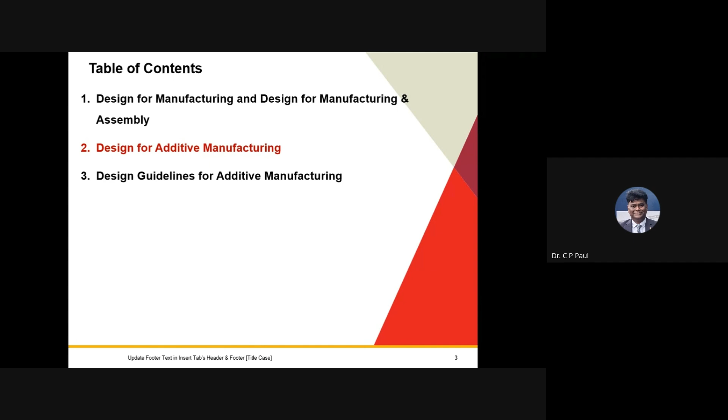Design for manufacturing and assembly is important because these two aspects are inseparable for production engineers, when we talk of functionality and manufacturability. At one end, you have to focus on the functionality of the component or system you are developing; at the same time, manufacturability is also important. So people started thinking on this, and we, being conventional engineers, were pushed to develop our whole thought process so that it is inherently imbibed in our thinking how a component will be built if we design it in a certain way. So the concept of design for manufacturing brought a big change.

With the change in emphasis, specifically with the introduction of mass production of components, especially when talking of batch production or assembly lines, the concept of design for manufacturing was further extended to ensure interchangeability and repetition by including the criteria of assembly. So it became design for manufacturing and assembly.

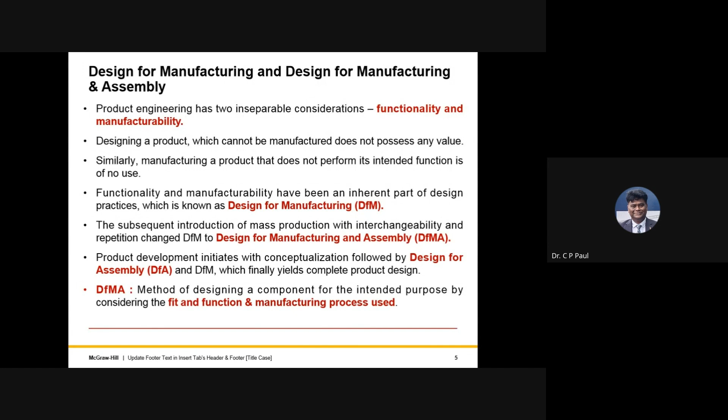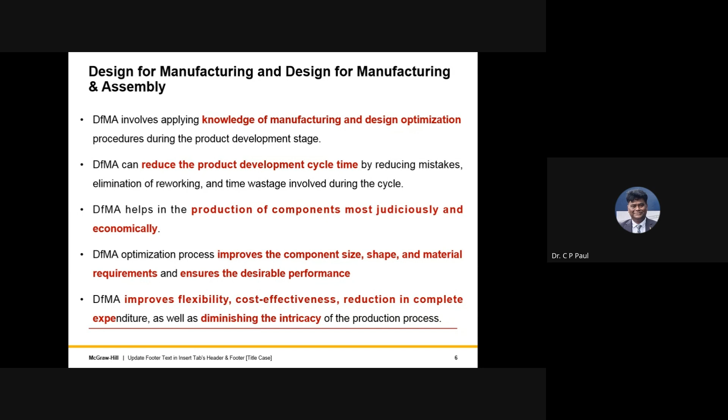As far as DFMA is concerned, you should have knowledge of manufacturing and design optimization procedures. Finally, it reduces the product development cycle time and brings economic benefits into the picture. Definitely component size, shape, and requirement changes, and ensures desirability and performance. In summary, DFMA brought flexibility, cost effectiveness, reduction in complete expenditure, and diminishing intricacy in the production process, bringing a leap in development of different components and manufacturing.

It starts with the design concept, then we go for design for assembly, how the different components will be assembled. Then we talk of material and process selection and cost estimation. Then we take the best design concept, and after that we go for design for manufacturing, followed by design for minimum manufacturing cost. Then we go for the prototype, and once this is built, we go for production.

At the same time, if we find there are issues in the assembly, people take it back and modify it, so that the product structure becomes simple from the assembly point of view. At the second point, people also check that yes, it's simple from the product structure point of view, but is it economical or not, and should we remove or add something?

For example, sometimes the designer's dimensions may come out as some odd dimension, say 103 millimeters. Now we know that 100 millimeter is a standard bar available in the market, so you can always modify your design and size so that economicity can be brought into the picture, and decisions can be made accordingly.

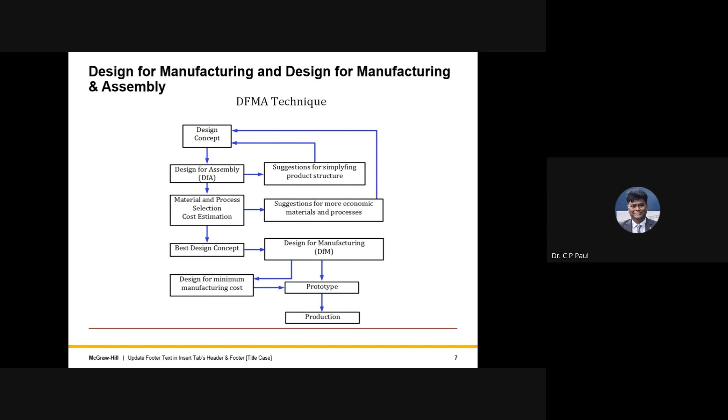Once the prototype is made, this basically serves as proof of concept of the whole stuff that we've built, and then we go for production. This is the typical flow chart that we follow for design for manufacturing and assembly.

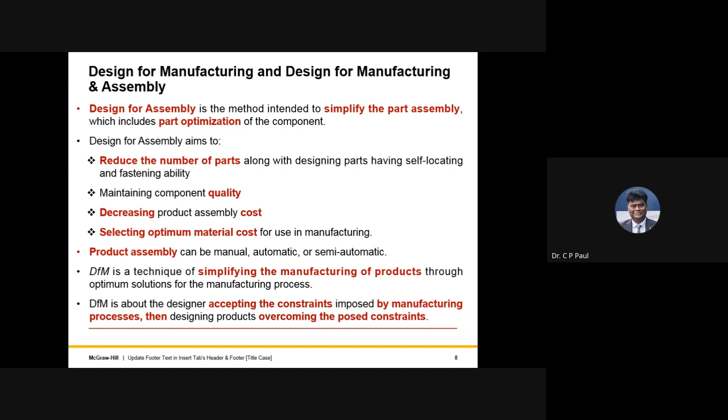These things have definitely changed the stuff and brought a lot of economic benefit, optimization on the material side, and simplified the manufacturing of products, without compromising on the constraints put by the manufacturing process, and overcoming whatever constraints are posed while designing the product. So this concept really moved out and worked for many years.

With the introduction of additive manufacturing, when we talk of the terminology called 'complexity for free,' we came to realize we have to think from the additive manufacturing point of view in such a way that we are able to achieve things in a bigger way.

If you see the way things work today, many of the things we build, we have not changed the design of the component considering additive manufacturing as a process. Earlier this was made by some conventional process; now we are making the same thing as a direct part, by directly using additive manufacturing. So that is the first stage of design for additive manufacturing.

Then we are only replacing the process, nothing is changed. After that, once the part is made and built, we may go for the second level, where we are focusing on the form of the component, not the function. For example, in conventional manufacturing we may use two parts welded together, and to support the welding there are some features included in the part.

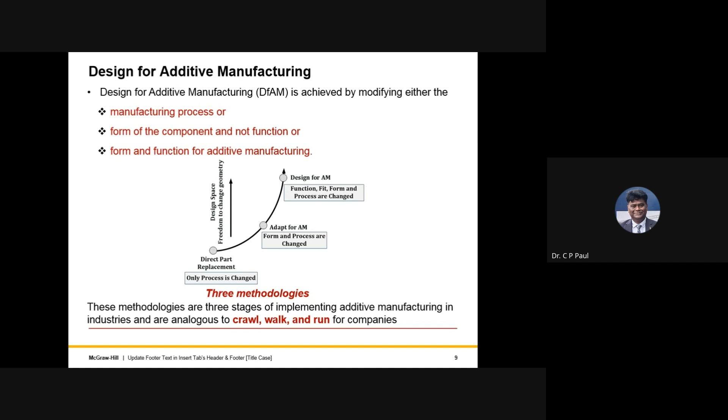When I'm talking of the first step, which is the direct part replacement, here we are changing only the manufacturing process. Earlier you were making something by casting or by fabrication. Now we are doing this specifically for components which are obsolete, maybe some pumps or particular components which are not supplied by the OEM anymore. You want to build it, so we do the reverse engineering of that, and the process is changed.

Now, in this particular thing, when you want to reduce the cost of material use, people are thinking how the complexity of the process can be removed, whatever is put into this, and the number of parts which are brought into this are also removed.

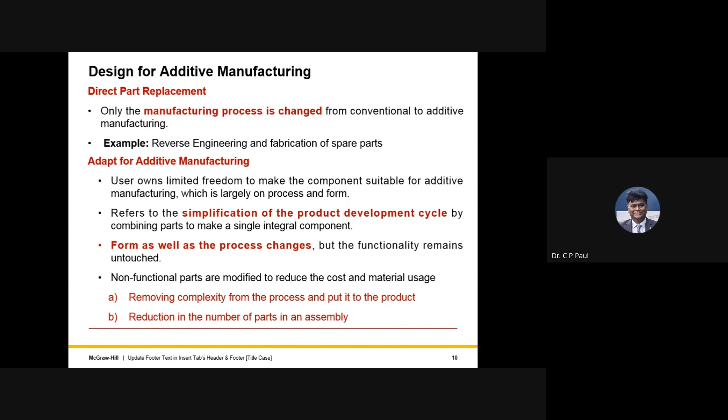For example, one of the classical examples that people talk of is GE's fuel nozzle, which had 20 parts. When it was made using additive manufacturing, they were reduced to one. So what is happening is a number of stages are removed, and that's the way the whole thing can be brought. That is the idea when we are talking of step number 2, which is adapting for additive manufacturing after improving things from direct part replacement. But I already told you, if you want to go to the final phase of adoption of the technology, we need to focus on form, fit, function, and the process as complete freedom.

We should start thinking differently, so that we really forgo the things we learned as a conventional manufacturing engineer, but try to bring the concepts of additive manufacturing imbibed into us, so that we think differently and take advantage of the full potential of additive manufacturing, specifically by employing concepts like generative design, topology optimization, and bio-inspired components, so that this becomes a very attractive technology for making components.

If you see the whole process, the design process is moved from design for manufacturing to feature-based design and manufacturing. This means today people are not thinking about what material they want to use. They are focusing on what feature they want, and according to the feature, they can think of bringing in different materials, and that's the way the new paradigm has come when we are talking of feature-based design and manufacturing.

For example, in a part you can have a multi-material concept. You can have two different materials - wherever you want better cooling, you can use copper as a material; wherever you want strength, there you can use steel as a material. So the combination is that we are not thinking a lot about the material, but focusing on the features that we want, and accordingly the whole product is built and made.

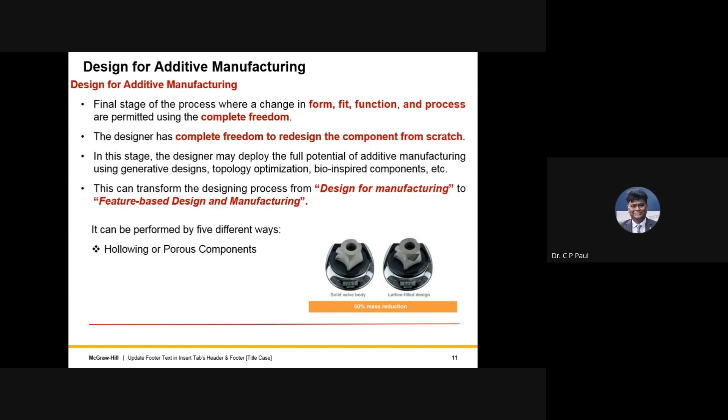You see this particular component here - these are the parts which are made, and you can remove the porosity and give only the feature that you want. As a result, you have a really good reduction in the weight of the part just by making a lattice-filled design. Though externally everything looks the same, the hollow and porous structure has really saved a lot of cost and production time while fabricating the components.

Another concept is, for example, when you are working on a design - say you see the first conventional bracket which is built, and when they did the topology optimization, they could reach an optimized design, which is altogether a different concept, and the technology is used.

So what we are doing in additive manufacturing is, we are not making the conventional bracket, but taking it to the optimum shape, which is very attractive. The design is basically focused on the stress flow in the material, which gives the advantage. Making an optimized design using additive manufacturing is not challenging, while if the same is built by conventional method, then a lot of things have to be brought in.

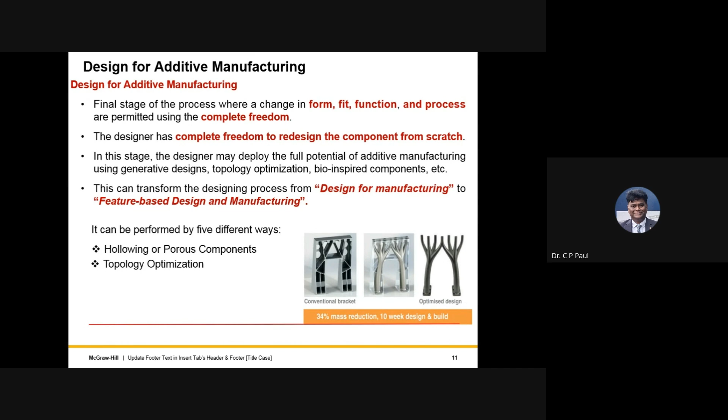There can be a case when we want higher surface area per unit volume. So to increase heat transfer, we can think of using aluminum heat exchangers like racing cars, how complicated things are built, especially very nice fins are built. These are not possible by conventional methods.

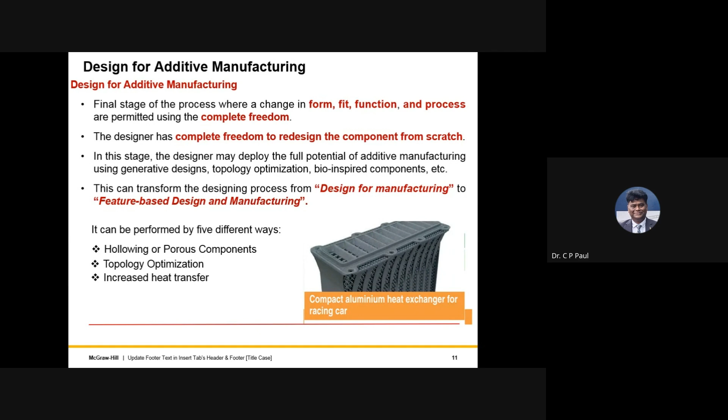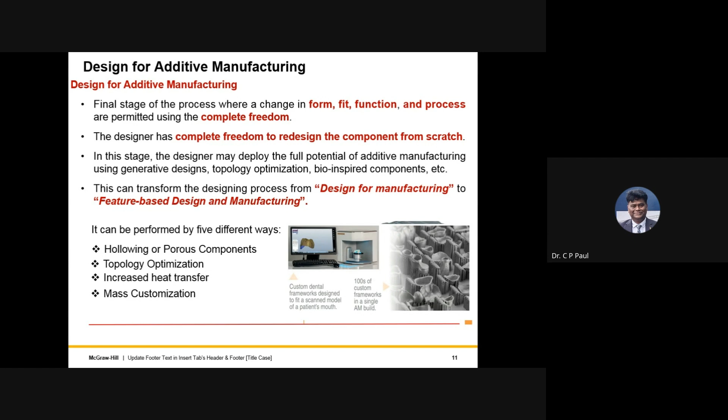Again, this is the output of the finite element design that people use as a tool to design the components. It is possible to have mass customization, like you can have hundreds of custom dental frameworks built in a single build. So these are the things, how you do nesting of different parts and go for mass customization, building in one way, making a difference as far as design for additive manufacturing technology comes.

If you want to make a bicycle, you see the frame has bricks on it, and we need not build the whole stuff the way it looks. You can always make a small part by breaking the components and bring it to the size we are looking for and join them together. Here you see the left and right hand side, we have a bike and how the frame is built in a beautiful way so that in lesser time, the whole component can be built as a single unit and later trimmed off and joined together so that the desired design can be achieved.

So this is the way design for additive manufacturing has to be thought. It's not about making the whole assembly in one way, but how can you make small parts which fall within the build volume of the machine, the build envelope of the machine, so that the component can be built to the next level.

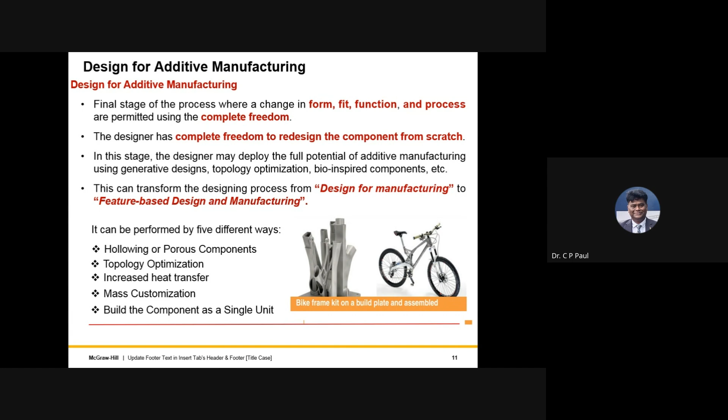So what is happening when we are talking of these five different ways of doing design for additive manufacturing? We have to have some rules in our mind so that we can proceed and make the things into this.

The first concept is part orientation. We have to think of part orientation as the alignment of the CAD model on the additive manufacturing build plate, and you have to make it in such a way that the support structure required to build the component should be minimum. At the same time, the slicing surface, because it's a well-known fact, the surface quality on Z, the vertical plane, is better than the horizontal plane where the components are built.

So if you want really good surface finish, you have to bring it to the vertical plane. But the component size may be such that it may not support that. So slicing strategy has to be built in such a way that it helps. At the same time, we have to go for really optimum toolpath generation, because in my last talk I told that we are making a change of orientation by 67 degrees in every layer as standard practice.

So that residual stress and distortion can be reduced. Here we have to focus on toolpath generation so that the different components, specifically when talking of different sections within a layer, how it's going to come together has to be in your mind, and we are focusing specifically on part orientation.

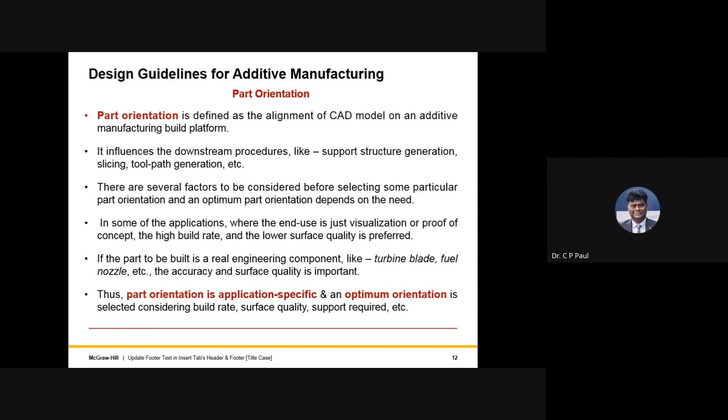But during the process itself, how the main design can be disintegrated or reoriented in such a way that it leads to optimum fabrication time, optimum use of material, least support structures, and the surface quality should be in the best possible way. Therefore, part orientation is application specific, and optimum orientation is selected mostly focusing on build rate, surface quality, and support conditions required.

Now, support structure is required to build a component, specifically if it has overhang structures. For example, if we talk of making some overhang structure and you want to work on it, people use some other material for this, and these materials are normally sacrificial material, and the joining with the main part is also thought to be minimal, and they should be easily removable.

And specifically when you are doing a lot of support structure, it should facilitate the fabrication of complex geometries, and generally it is removed after the completion of the build process.

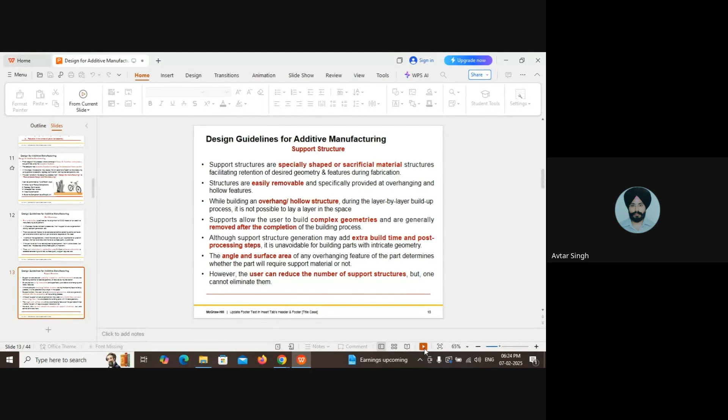The complexity should be such that we can easily remove support structures after completion of the build process. More support involvement results in extra build time and post-processing steps. Therefore, we should avoid having support structure as much as possible. It should be as least as possible. This is also a criteria for design for additive manufacturing which we need to consider.

Surface area and the angle need to be designed in such a way that support structure requirements are reduced. In general, you can always think of reducing the support structure in additive manufacturing, but it's not possible to make it zero, because of the complex geometry of the component that you are building.

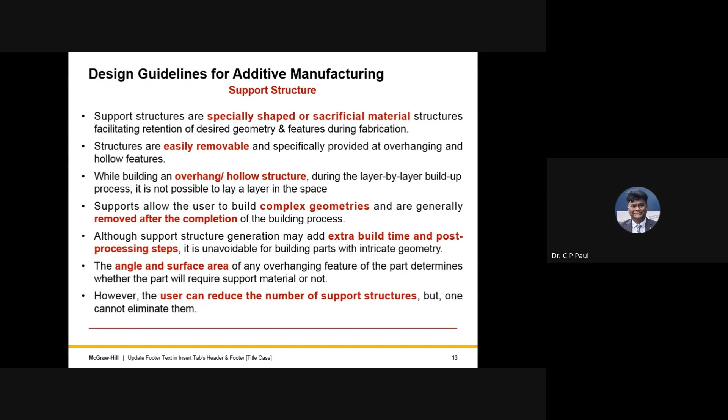Now, how do people make different types of support structure? Specifically when using CAD models in pre-processing software, people generally divide the component into three geometry locations: down skin, inner core, and up skin. Different types of support structure are fabricated for each so that post-processing steps can be reduced.

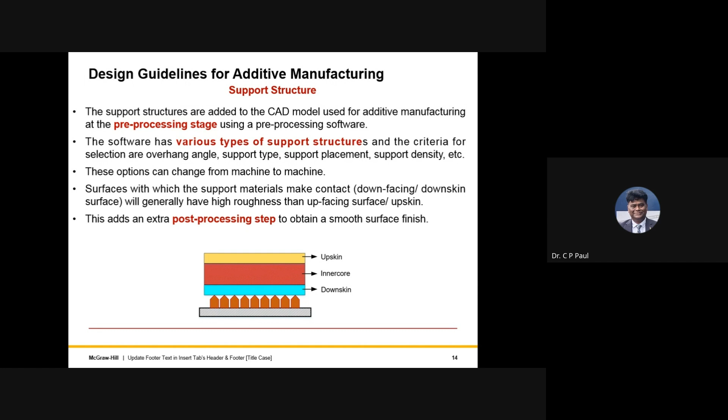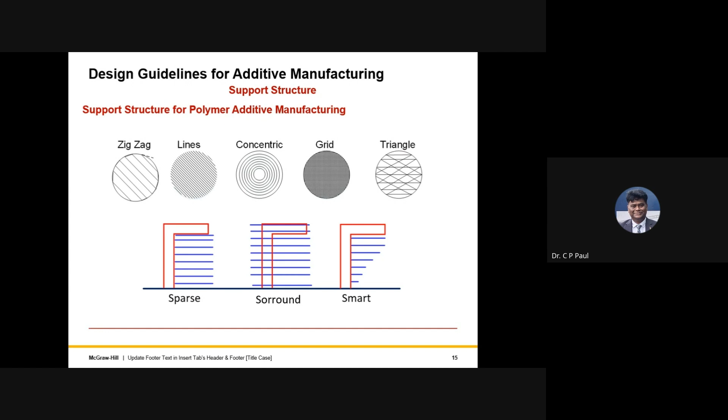Whatever filling we do for the support structure, in all criteria like sparse, surround, and smart, this can be in the form of zigzag, lines, concentric, grid, or triangle, depending on the application. Most widely, people use lines, so the work can be easy to carry out.

In metal additive manufacturing, the most common application of support structures is to build components with overhang structures. It's also used to transfer heat from the top layer to the bottom layers, so that overhang structures are not affected.

For example, if you make a very fine and thin support structure for supporting any surface, you have to think about how well it handles the heat when going for multi-layer deposition.

When making support structures, we also have to think about how they are placed so that warpage and build failure can be reduced, and specifically the cumulative residual stress generated during the process can be brought down. This is also part of what people think about directly with support structures.

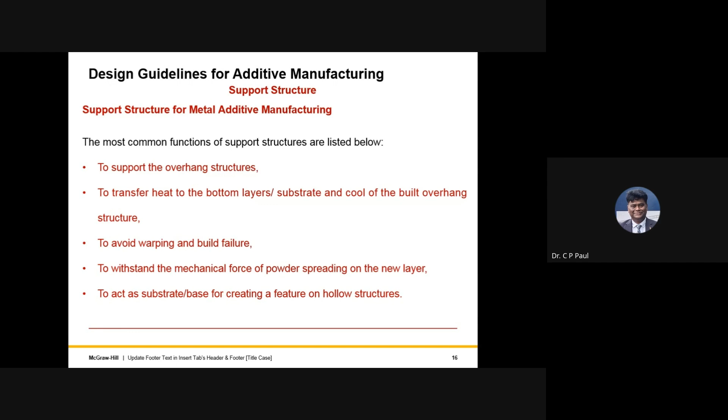The primary support structures are generally generated using 3D modeling software with some user-defined features. But when it comes to defining the secondary support structure, they have to be taken care of specifically using pre-processing software in the support generation options.

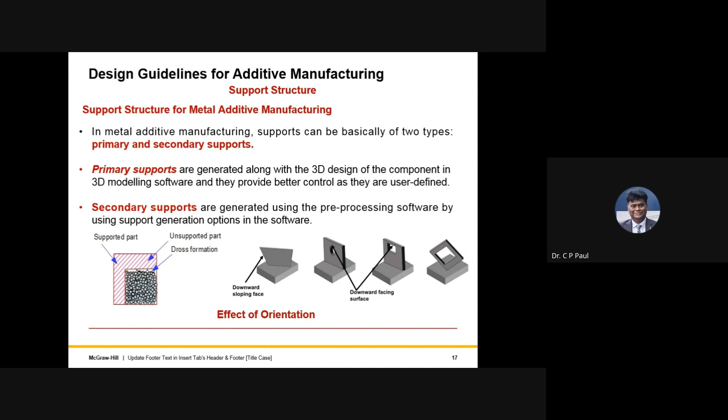Consider the effect of orientation - in the first figure, the downward sloping face decides what the support structure will be and what surface quality we get. Similarly, for circular versus rectangular geometry, the overhang surface helps decide how the support will be applied. So depending on the geometry and type of component, we have to think about how the support structure will help in different formats.

Support structures are normally block type - you can see different caches that have been made. Then there is point type, where you have support from a single point, and also complex web and contour type.

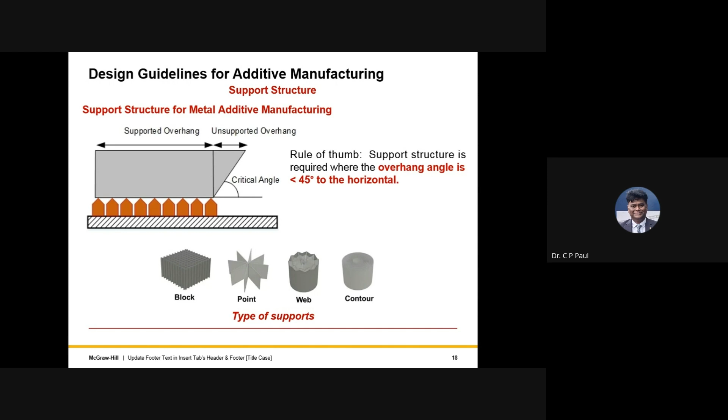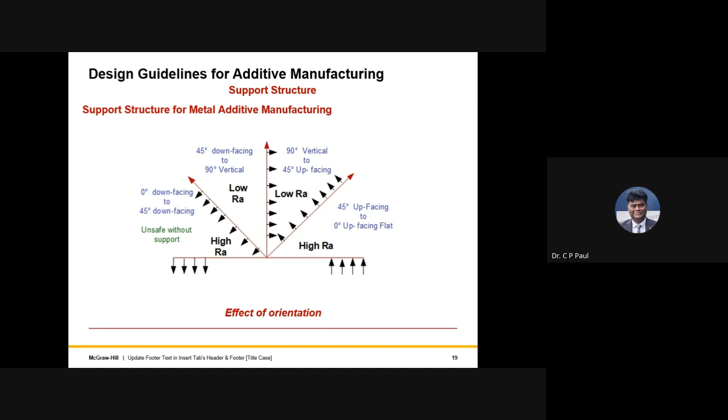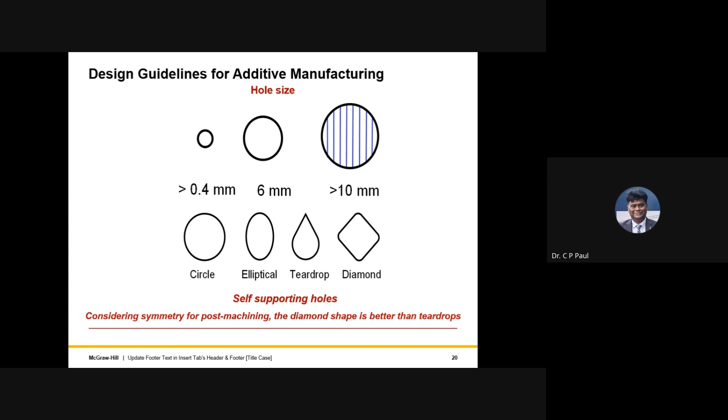Circular holes are not a very good concept for additive manufacturing. There is always a thrust towards using a teardrop or diamond shape instead, so these shapes can be used more supportively. So if you have the option of a circular hole or a teardrop hole, in the direction of building we would prefer a teardrop or diamond shaped hole, so the thing can be taken to the next level.

As I already told you, ellipticals can be built about 25 millimeters tall if the height of the ellipse is twice the width, and similarly teardrop shaped holes, a combination of circular and straight line portions forming a peak, can be built this way. Teardrop and diamond profiles are commonly used in fluid channels as they have comparable hydraulic performance. You must know that in fluid dynamic design, hydraulic diameter is used to identify some of these things, and here it is the same.

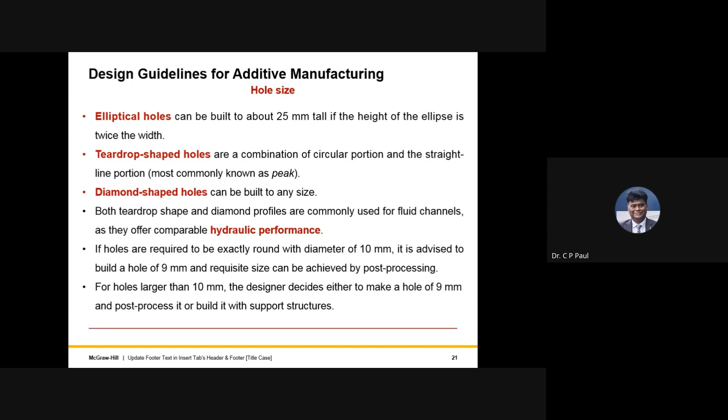If the holes are required exactly round at 10 millimeters, it is advised to build a hole of about 9 millimeters, less than 1 millimeter under, and achieve the requisite size in post-processing. Anything more than 10 millimeters needs a real surface support structure, which makes things different in format.

The layer thickness and build rate is the second thing we need to focus on. If you have a higher layer thickness, there would be a stair-stepping effect. Though the build rates are good, removing the stair-stepping effect will also cause extra post-processing time. So we have to optimize how to handle the stair-stepping, or go for a lower layer thickness. That's how people decide and define this.

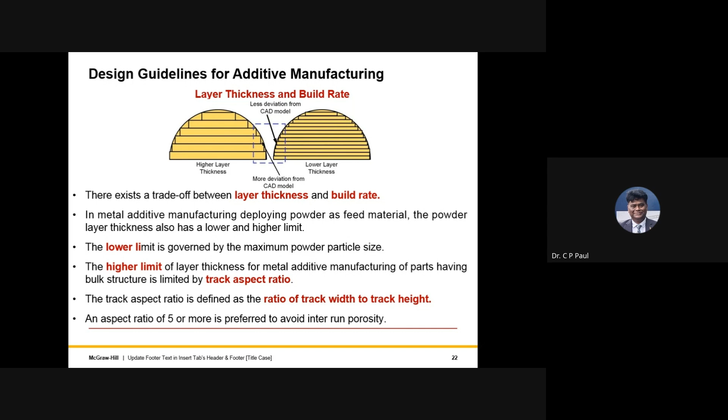In general, the lower limit of layer thickness is governed by the maximum powder particle size used, whether in powder bed fusion or directed energy deposition. At the same time, the higher limit of layer thickness is defined by the track aspect ratio. In most cases, the track aspect ratio, meaning the width of the track divided by the height of the track while depositing material, has to be more than 5, otherwise it will lead to inter-run porosity. So this is how layer thickness and build rate are determined.

There are also issues as far as the minimum wall thickness and ribs are concerned, and there are guidelines people have built on this. For example, if you're making a basic building block where you're more bothered about distortion and weakness, you need to focus on these things. In case of laser, the diameter of the energy source or nozzle defines the wall thickness in a big way. In general, for metal additive manufacturing, values of 0.4 to 0.6 millimeter are fine, and in polymers, 0.8 millimeter thick wall can be built easily. This is the number available so far.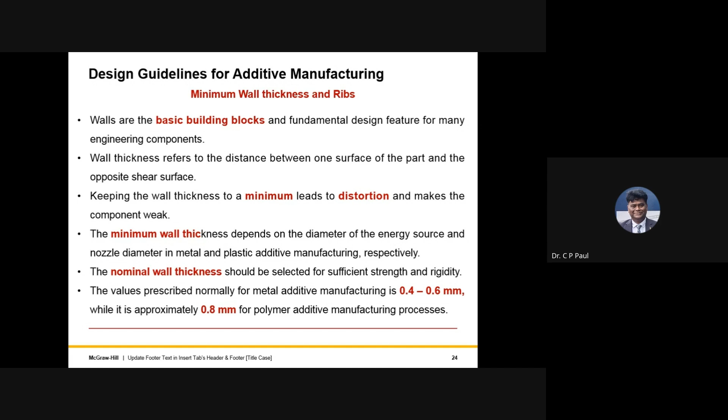In polymer manufacturing, we mainly use material extrusion processes like FDM. You cannot go less than twice the diameter of the nozzle. For example, if you're using a nozzle of 0.4 millimeter, the minimum wall thickness you can go for is 0.8. That is the minimal criteria people think and go ahead with.

Another thing that comes into the picture is how the perpendicularity of the surfaces are maintained, and there may be distortion or deviation while meeting an L-shaped structure and wall which we want to be perpendicular. So people give some ribs which are used to distribute the forces while making the part and reduce the stresses and distortion, minimizing material wastage and time.

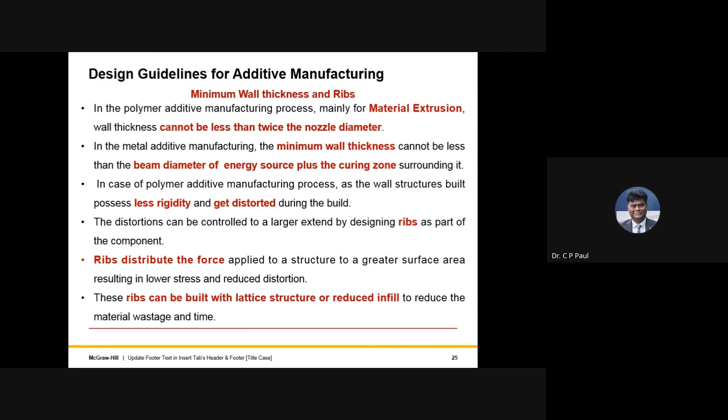So if you talk of making a minimum wall thickness and ribs, suppose you have a thin wall as I've shown here, people go for making a rib so the thing can be built. Thickness of the ribs is normally 75% of the wall thickness, and the height of the rib has to be less than 3 times the thickness. Rib spacing has to be greater than 2 times the thickness, and fillet at the point contact of the rib and wall decides many of the parameters. So this is how minimum wall thickness and ribs are built in general, in plastic as well as metal additive manufacturing.

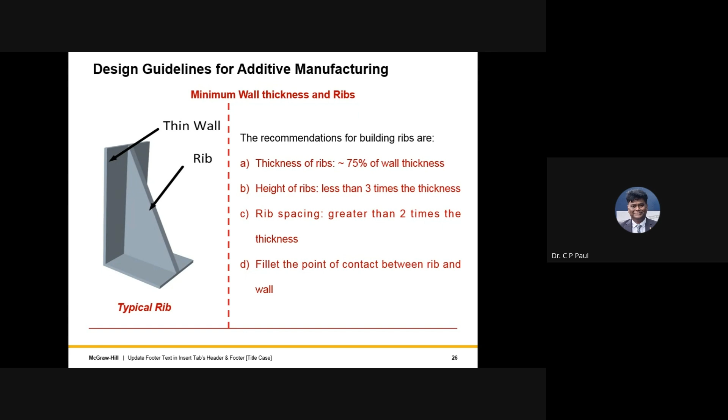Another thing that defines the build volume of the machine is the maximum part size you can build using it. Whenever you have larger components which are marginally larger, you can think of going for scale-down components. But if that's not possible, you have to break the component into different segments and put them together so the overall fabrication size or build time is low. That is the concept that decides the maximum part size.

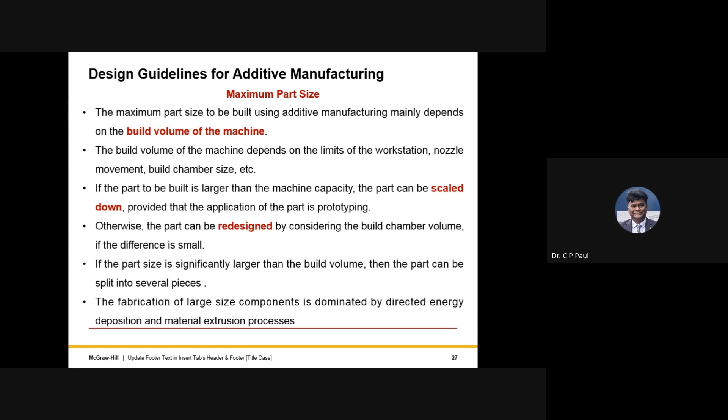Many times it happens that a design may be off by 2 or 3 millimeters. Then a design review can be done and the component built accordingly. It is true that large size components can be built using directed energy deposition and material extrusion processes, and other processes are not competitive, which we need to understand. This is the thumb rule as general guidelines for design for additive manufacturing.

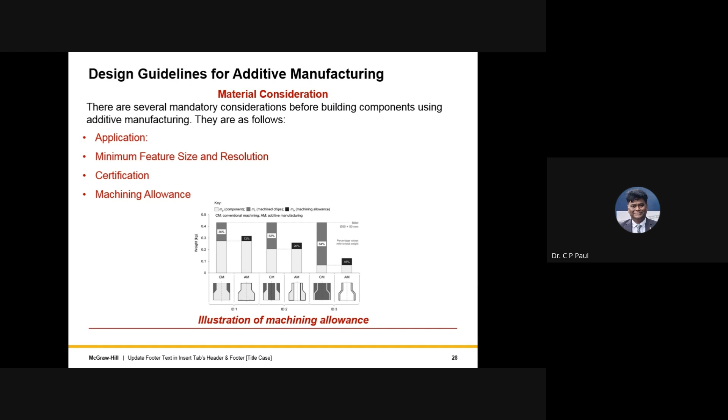When making different components, material also plays a role, because the material's thermophysical properties and compatibility when using different materials matter. It's decided basically by what applications we're using, what minimum feature size and resolution we want, what the certification criteria are, and how machining allowances are placed on different surfaces. These are things we need to work out, and material considerations are very important for making different shapes in the part.

So in general, the thumb rule is avoid dissimilar material parts, because dissimilar material parts create a lot of stresses at different levels, so people want to avoid it. Second, if a single material part is made, that's good. People do not go for dissimilar materials for two parts if the function does not demand it. Reduce the use of expensive materials if the application allows - for example, you can have a core with one material and the surface from another, if your application demands only surface properties, not bulk properties. Implementation of hollow or lattice design for expensive materials, for economic consideration, is also important.

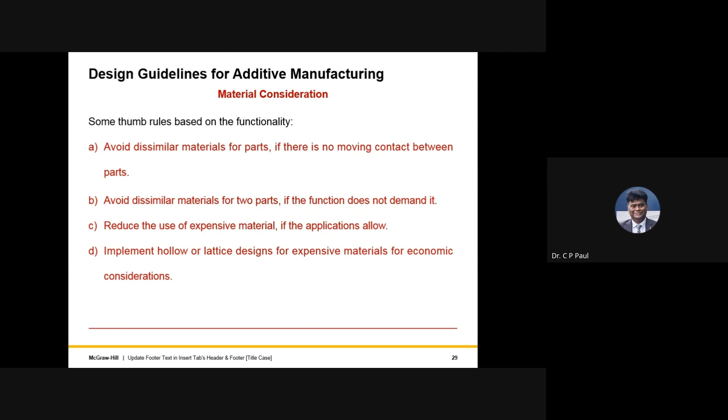So these are the things we consider as design guidelines for additive manufacturing, especially focusing on material consideration.

There was a discussion on residual stress during additive manufacturing. We have to focus on the temperature gradient mechanism rather than this. For example, I always tell students that if you put a whole plate into a furnace, the whole component is heated, and when cooled, the whole component is cooled. But this is not happening with lasers. What happens is when you put the laser on a substrate, the substrate gets expanded locally because of the temperature, and you have stress coming on that.

But what happens the moment the laser melts the material into molten conditions, all the stresses developed during the heating process become zero. When the laser moves out from the location and there is cooling of the substrate, you generate stresses which are tensile in nature that we have to think of.

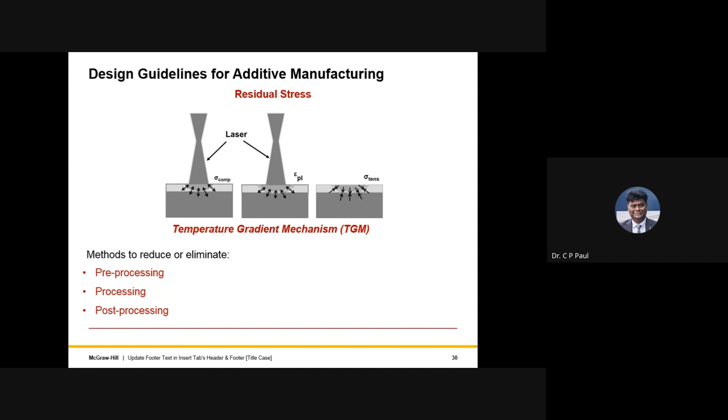And we have to think of how this can be reduced by pre-processing, processing, and post-processing. Specifically, when we are talking of residual stresses, what should be our strategy which will make things comfortable for us to move and work further.

For example, if you use some pre-processing methods, you can avoid stress concentration cracks. You can remove areas wherever you have uneven thickness. We also try to avoid large masses for deposition, and large abrupt changes in cross section. This helps us, and can be done by filleting all the positions.

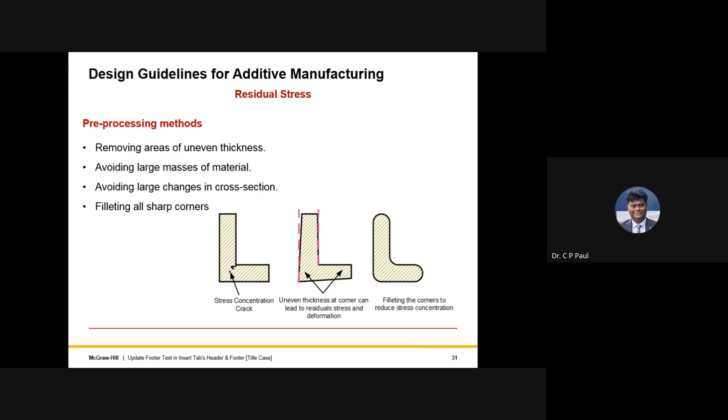For example, if we want to make a component as shown with the stress concentration crack, you can move it to this level which will not have a sharp end, so stress concentration is less. This design is preferred as an outcome of design for additive manufacturing.

When we talk of residual stresses, we need to think of different processing methods. For example, you can use Meander and rastering. You can also involve strip filling with two strips, and you can have a chessboard pattern. In these chessboard or stripe patterns, every layer's raster pattern is moved by 67 degrees, whether it is stripe, chessboard, or Meander.

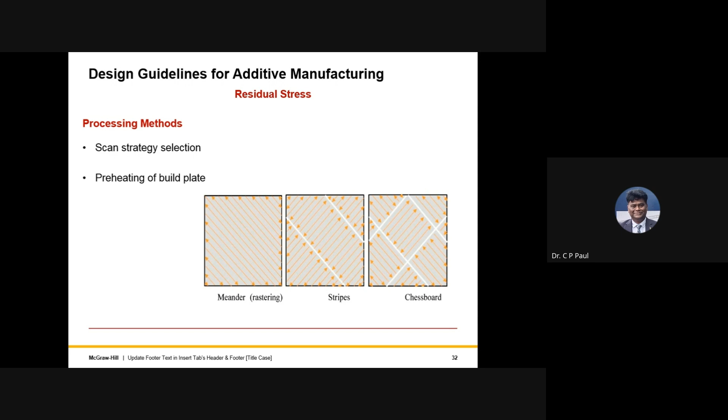Residual stress can also be further reduced by having a reduction in the thermal temperature gradient, by providing a preheated build plate, which makes things better for us.

Now, if you see the comparison of various things happening in terms of wall thickness, support overhang angles, holes, clearance, and minimum angle for the various processes, for example material extrusion, vat polymerization, powder bed fusion, material jetting, binder jetting, and DED - these are the parameters showing how each works and their different possibilities.

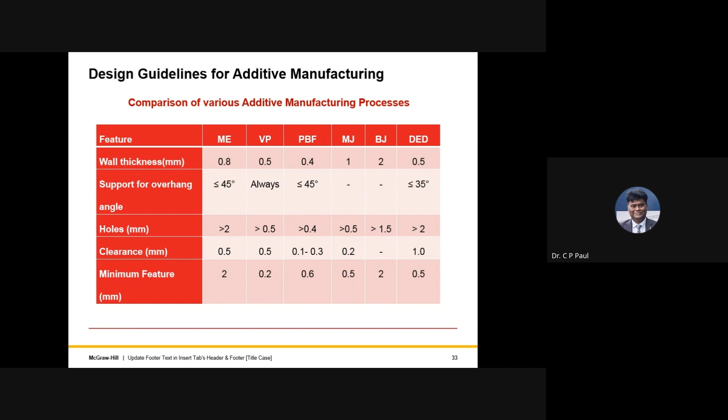Now, when we talk of powder bed fusion systems, specifically with metal additive manufacturing, the two types of technology available are laser powder bed fusion and electron beam powder bed fusion. Now let's see how these two technologies compare in terms of orientation - like up-skin vertical smoother, down-skin rougher, similarly for electron beam.

The difference specifically comes when we talk of wall thickness. In laser powder bed fusion, you can have minimum wall thickness in the range of 0.3 to 0.5mm, but in electron beam, you have to go 0.6 to 1 millimeter. Similarly, for clearance, we have to keep 150 microns clearance in assemblies and 1 millimeter in parts, while more than 1 millimeter to remove the powder particles.

So comparing electron beam powder bed fusion with laser powder bed fusion machines, laser powder bed fusion scores many positive points. But in terms of fabrication time, electron beam powder bed fusion helps and takes us to the next level.

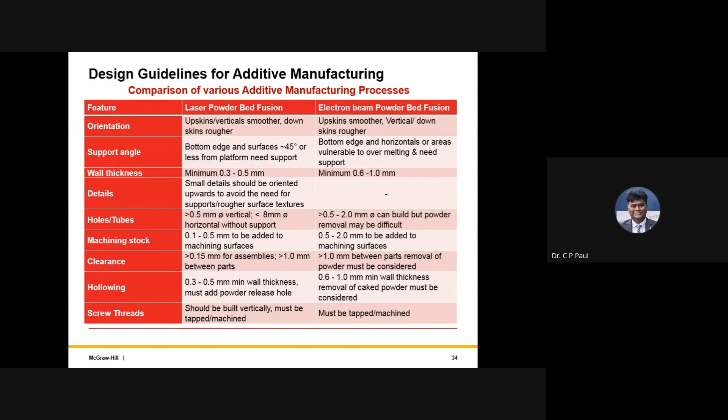You must be knowing that a lot of things are being called topology optimization, meaning we are iteratively optimizing the shape of the component purely based on its functionality. This is a new trend in design, and a lot of things are being done. Earlier there was a limitation in terms of fabrication of components, but now with additive manufacturing, things have changed and topology optimization is at its peak.

So we use some numerical tools without taking the manufacturing process into account, based on the mechanical criteria to be optimized in a given design space, and then we allow this to change. Topology optimization technique not only permits the geometry change, but also the topology of the components being fabricated.

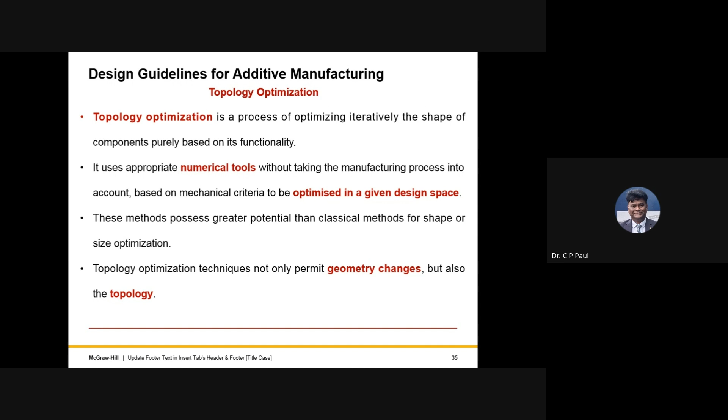The aim of topology optimization is to have optimum material and void distribution inside a particular design area for a given set of loads and boundary conditions.

People use this technology for design of building lightweight structures, organized design for manufacturing, reducing time to market, reducing usage of material and process energy, and eliminating the prototype stage. These are the advantages of how topology optimization makes a difference as part of the design guidelines for additive manufacturing.

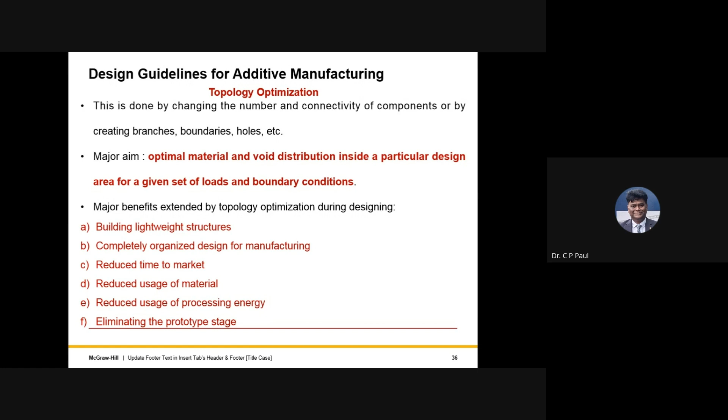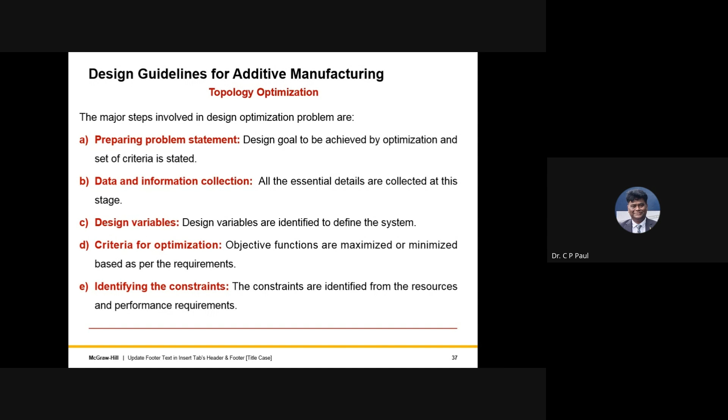So what we have to do: first prepare the problem statement, define the goals, collect the data and information, then identify the design variables, go for optimization, apply the constraints, and build the component.

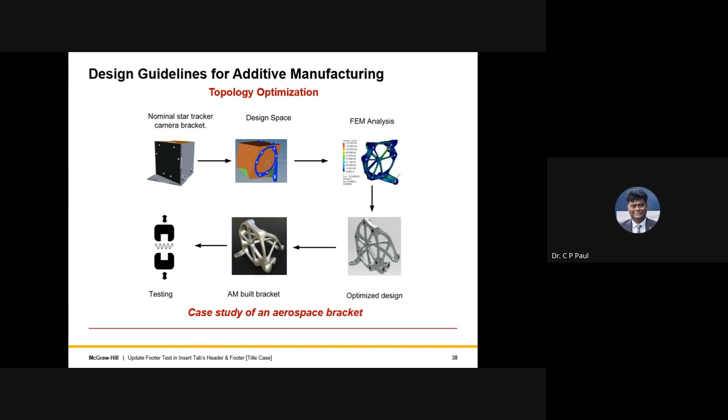This is an aerospace bracket that was built. Earlier the bracket looked like this, now it has changed to this. If you compare the two, you'll find the star tracker camera bracket has become smaller, cuter, and better, with a lot more flexibility provided, which was not the case with the other one.

If you talk of the conventional front suspension system of a TransFIORmers vehicle, you'll see how they reduced the weight, especially the critical wishbone front suspension components, by reducing material quantity by 40%. Here you see the conventional version built using pipes and such.

But if you do topology optimization, it can be brought to this level. You see the grids have come in, different parts formed, and not only is the strength maintained, but for the same strength, the material is reduced by 40% just by putting the critical wishbone front suspension into different shapes and formations.

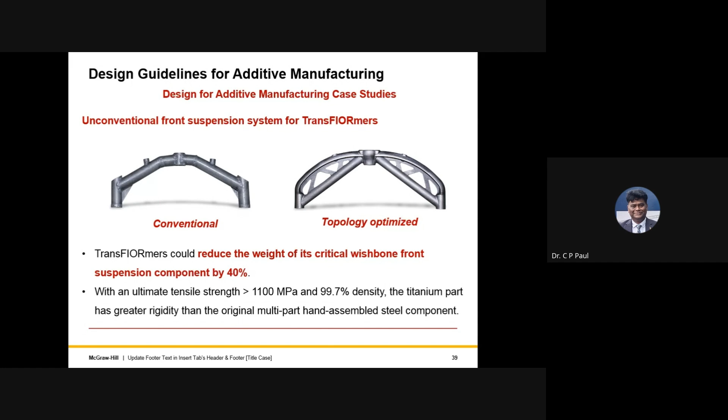Now suppose you want to make a spinal implant. Normally, people go with grade 23 material for making the spinal implant as recommended by FDA, and test it for chemical properties and then mechanical properties, and then devise the whole stuff so that it works as a spinal implant. This is the requirement we are doing it for.

As far as body parts are concerned, it's a premium segment. A lot of things can be replaced and made, where things become good and easy for us.

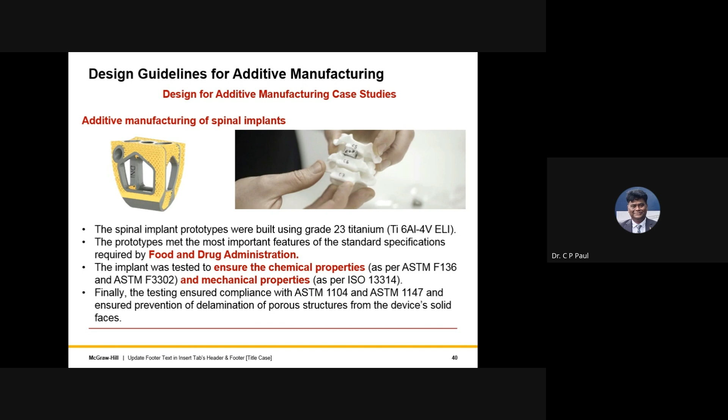Another example is making a knee joint for a cat. In the United States, at the age of 9, one hind leg of a cat was damaged because of bone cancer. It was cut and replaced with an artificial stifle. People designed it using Mimics by Materialise and printed the head using an EOS machine with powder bed fusion technology.

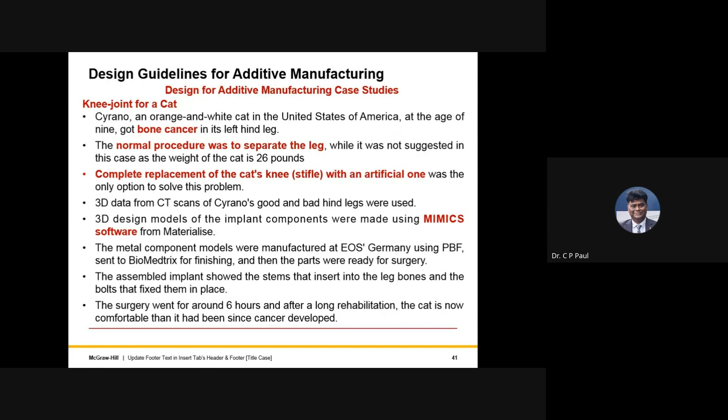So what I want to say is, today we learned how things have been used interchangeably and repetitively in design for manufacturing and design for manufacturing and assembly. But these do not achieve optimum design through conventional manufacturing. Therefore, this brought something new, specifically in the way of design for additive manufacturing.

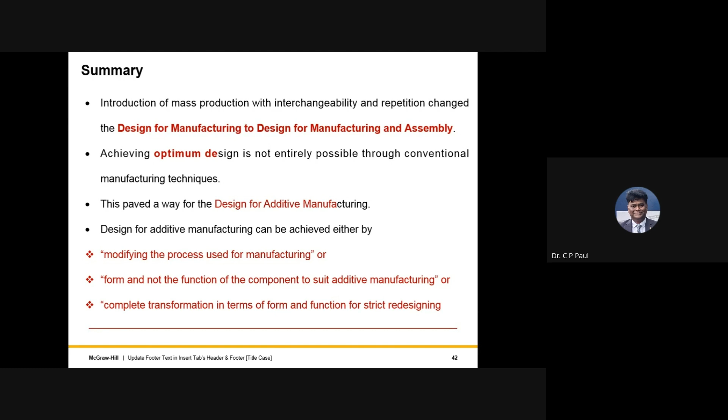Additive manufacturing design can be achieved by modifying the process for manufacturing, or modifying the form but not the function of the component to suit additive manufacturing, or third, a complete transformation in terms of form and function through strict redesigning.

But the design guidelines that I have discussed are the essential facts and figures for designers to design different components for additive manufacturing, and all these should work as an input kept at the back of the mind while making the components.

And still, whatever I talked about in terms of additive manufacturing is an art, not a science yet, because we still have a very long path to go. This technology is only some 35 years old, while other technologies have already crossed more than 2 centuries with humans, so we have to keep working on it.

Definitely, there are many advantages in terms of topology optimization. It is providing tremendous freedom by deploying additive manufacturing in terms of design and achieving cost saving and material saving. With this, I stop.

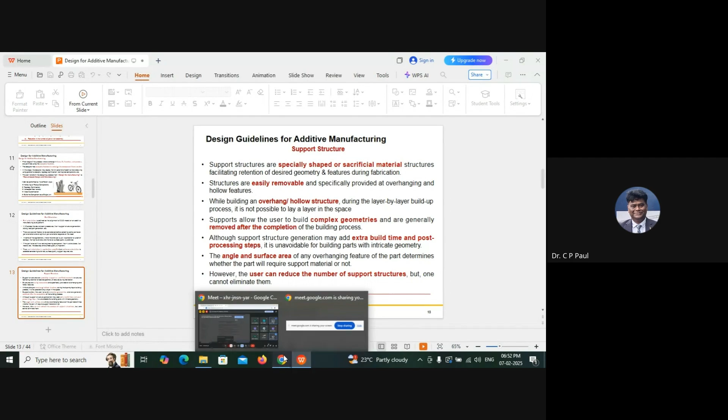Sir, any comments on production speed and material limitations in laser additive manufacturing?

If we talk of the production speed of a typical 2 kilowatt direct energy deposition machine built worldwide, the deposition rate we achieve is in the range of 6 to 20 gram per minute. While if you go with the powder bed fusion machine, the speeds are in the range of 2 to 10 gram per minute. That is the figure that normally people are getting. So powder bed fusion machines are relatively much slower compared to the direct energy deposition machine.

As far as material considerations are concerned, we have to check the compatibility of dissimilar materials when we are using them. For example, we were working on a job involving molybdenum deposition on copper chromium zirconium alloy. Copper chromium zirconium alloy and moly are not having metallurgical compatibility. So what we thought was to bring a layer of nickel between these two, because we know that moly and nickel are compatible, and copper chromium zirconium alloy is compatible with the nickel alloy. So we just brought in one layer of thickness 0.2 millimeter, and that changed the game. So when you're designing, definitely the thermophysical properties and the metallurgical compatibility of these materials are things we have to look for, and accordingly we have to design.